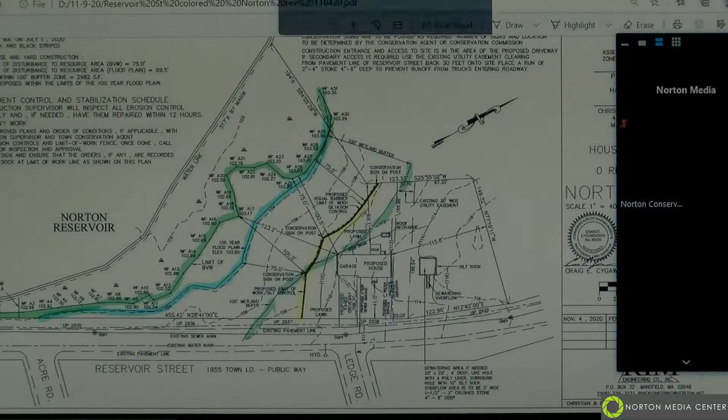Do we have a representative of the applicant? Yes, good evening, Commission. It's Cameron Larson with Environmental Consulting and Restoration. Also with me tonight is Craig Cyganowski with RIM Engineering. I'll open up the presentation, give you an overview of the project, and if you have any questions pertaining to design or engineering, Craig will be available to answer those also.

So can you see the map on the screen yet? I can see it, yes. Okay, just in terms of orientation, because this says 0, the address is 0 Reservoir Street, yet it seems to be within the Grove, is that correct? Or maybe tell me where it is. Yeah, well, it is 0 - they haven't issued it a house number yet. It's across from, near Ledge Road and Acre Road.

The home abutting to the north, I think, is 166 Reservoir Street, if that gives you any reference. So they will issue a different house number then? Yes, correct. Okay.

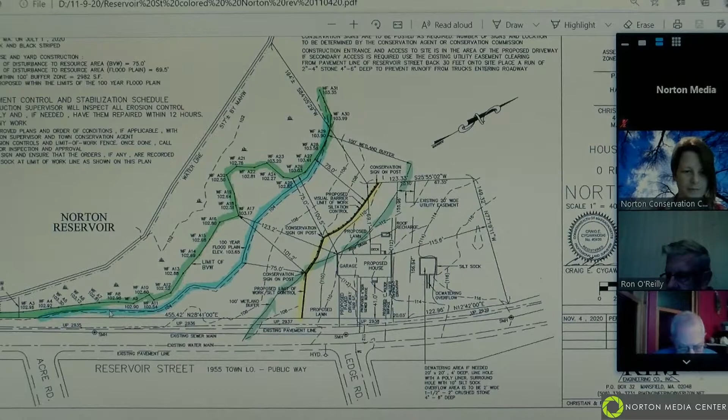All right, any other questions from either commission members or members of the public on this? One more question, sorry. Was there something about dumping leaves, the abutters dumping leaves next to the property? Yes, Jennifer did note that there were some existing leaf debris and lawn debris that most likely has been dumped from abutters or people within the area.

We didn't address it in the application. We're happy to take a look and remove as much as we can. We don't want to be getting into disturbing any of that inner buffer, but if we can easily enough remove it by hand, we can certainly do that.

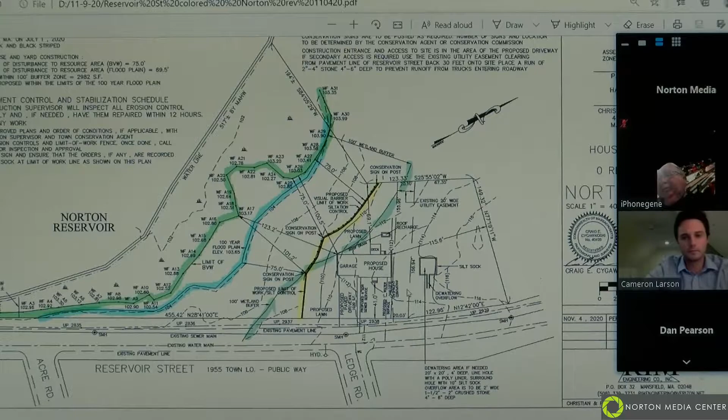Okay, thank you. Wasn't the trash and the stuff that was dumped on the other side of the proposed house in the easement, correct? I don't think it was in the wetland buffer. They actually had both. Oh, both? Okay, never mind.

All right, so I think if there are no further questions from anyone, we can consider closing the request for determination of applicability. I'll make a motion to close the public hearing. All right, we have a motion made by Ron and seconded by Pearson. All right, so roll call vote.

All those in favor? Ron? Aye. Gene? Aye. Dan Pearson, Aye. Dan Doyle, Aye. And I'll throw in an aye, so the motion carried. I'm also here, by the way.

Please, oh, I just, where are you? Oh, you're on the phone. Well, I'm still logging in apparently according to my computer, so I had to call in. Okay, so Lisa, you heard the proceedings then, and how do you vote? Aye.

Okay, and I assume there are no nays, so we're closed, and we can do a quick vote on assuming the project is carried out according to plan, whether a notice of intent has to be filed or not. We want to offer a motion on that?

So what is the update on this project? And do we have a representative presenting it? I see a Chuck Valentine on the list, but you're muted. And do we have another representative besides, there we go. Good evening. Brian Dunn was supposed to be involved with the meeting this evening, and I haven't had any correspondence with him, so I'm not really sure where he is, to be honest with you. I'm kind of a passive bystander to watch the proceedings.

Okay, so Jennifer, have you gotten any feedback as to where we are with this? I do. We have a revised plan, but it looks like I put the wrong one up.

Nope, that's still the wrong one. Everything that you asked for at the last meeting to be revised on the plan has been done. So you're actually all set to close.

All right, so no additional discussion is really needed. The additional information has been submitted. Correct. All right, so any questions about this?

And actually, can we just for a moment put up that older plan so I can get a visual as to what the project was in detail?

So it was a single family house off of Baker Street, that's off of Freeman. And it's really just this part with the septic system and this grading that's in the buffer zone.

And the no disturbance zone, this notation was corrected. The filter mitt does not extend into the road anymore. Trying to think of what else you asked for, but I did check the plans and they were corrected.

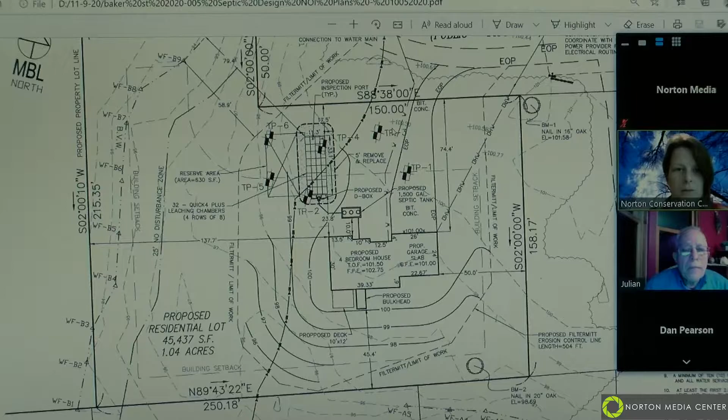All right, so I guess we can consider a motion to close the public hearing for file number 250-1068.

Mr. Chairman, this is Pearson. I'll make a motion to close file 250-1068. All right, motion made by Dan Pearson, seconded by Dan Doyle.

Roll call vote. Ron? Aye. Gene? Aye. Dan Pearson? Aye. Dan Doyle? Aye. And Lisa, you're at the bottom of the screen. Aye. All right, and I'll throw in an aye.

So we can deal with the orders of condition at the end of the meeting? You could, but it's just a boilerplate set of conditions. So nothing unusual other than citing the plan? Correct. Well, do we have a motion?

Did you? Oh, I'm sorry, Jennifer. Did you say anything about the BVW there? Yes, was that changed? There is a finding for it. Yep, okay.

Well, does that mean you want to make— I was going to say, while I'm at it, I'll make a motion to issue the order of conditions for 250-1068. Motion made by Lisa and seconded by?

Second, seconded by, looks like, Ron. I think you got it, right? Yes. All right, so to accept the orders of conditions boilerplate as submitted, file number 250-1068, Ron, how do you vote?

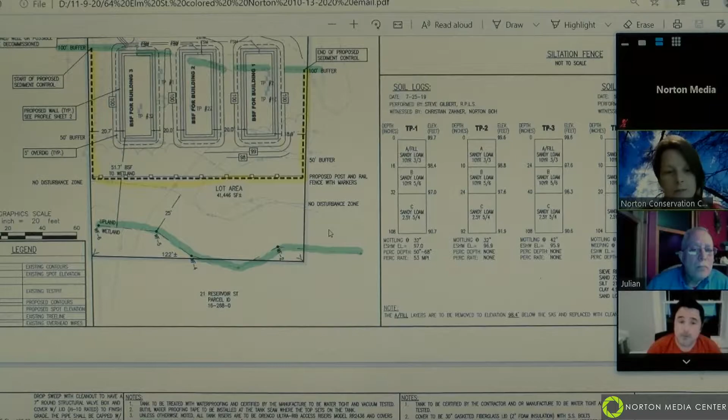So typically, the septic system has to be a minimum of 50 feet from a wetland. So Jamie, maybe you can explain what the difference is and if there's additional protection there, and we can go from there.

Sure. So with this plan we have 3 bottomless sand filters, which include advanced treatment for each bottomless sand filter. The property currently has 3 8-bedroom apartment buildings.

And so what we've done is we've designed an individual septic system for each apartment building. Bottomless sand filters function off of extremely high treatment, which is done through the tanks in the Orenco treatment system.

And then is sent to the bottomless sand filter for treatment and recharge into the ground.

We do have at a minimum 51.7 feet from the edge of the proposed bottomless sand filter to the resource area. So under Title V, we meet that setback.

We've also added in a post and rail fence with markers as asked by the agent and some modifications on some notes and things like that.

Overall, I don't expect any changes from the Board of Health. We've already addressed their peer engineers' comments. We've gotten a letter of support from Orenco, the advanced treatment company.

They've had their engineers go through to check the system, and we've received written approval today, which I can send to Jen. And again, I think this is the best fit for this site.

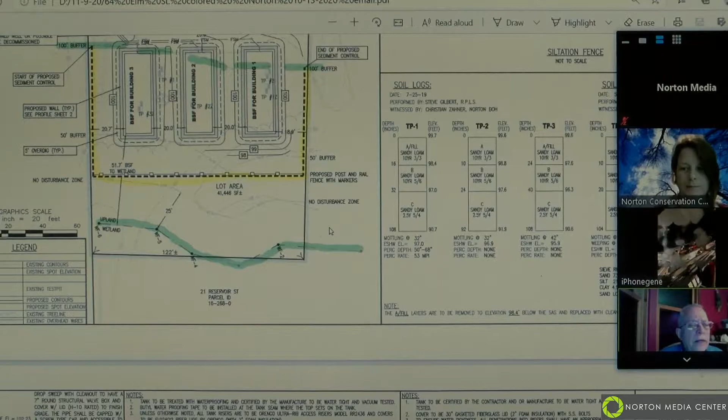Jen, if I get the understanding of your statements, it seems like this is a foregone conclusion that this is going to be acceptable to the Wetland Protection Act, and we potentially can close tonight. The plan as they proposed it and designed it does meet Wetland Protection Act, yes.

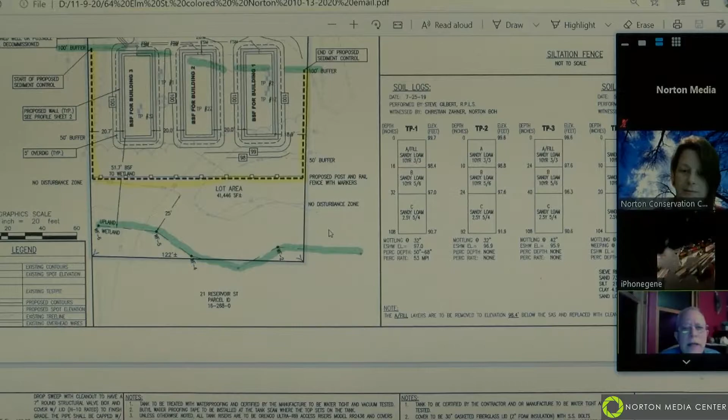And just out of curiosity, exactly where is this site? It says 64 Elm Street, but I'm not familiar with 3 apartment buildings there. Where might that be? Jen, we have a locus map on the top right. This is Elm Street. This is Reservoir, and this is Cross Street. Oh, I think I know where they are, it's right at that curve. Okay, I got it. I just somehow they blend into the background. I didn't realize there were a total of 3 buildings there. It sits back a little bit.

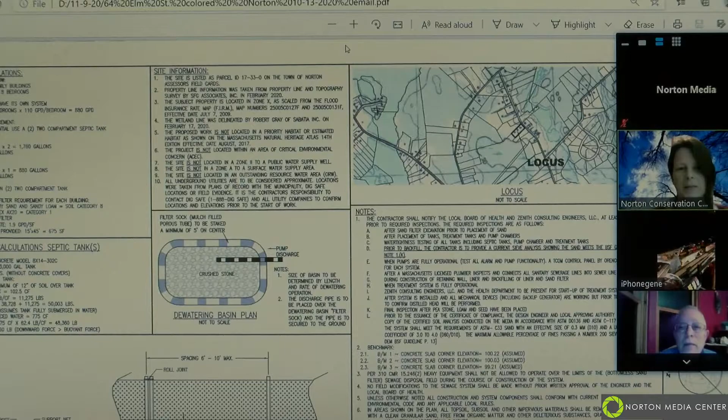All right, Jennifer, one point of clarification I had in your notes and in the order that you wrote up is that you said it's closer than 50 feet, and I think that plan shows it's not. Right, so we just have to change that at some point. Okay, so it's definitely not closer than 50 feet, is that correct? Correct.

51.7, you said, Jamie? From the edge of the bottomless sand filter to the wetland resource, that is correct. But we do have work going within the 50 foot. So there's physical ground disturbance within the 50 feet, but the leaching portion of it is beyond 50 feet. That is correct. Okay, I got it.

So then we can consider, unless there are further comments, a motion to close. I'll make a motion to close notice of intent number 250-101060.

All right, Ron makes a motion, and I just have to say I just got a little message that my internet is unstable, so I might disappear, but I'll log back in. At any rate, the motion is seconded by Lisa. Roll call vote. Ron? Aye. Gene? Aye. Dan Pearson? Aye. Dan Doyle? Aye. And Lisa? Aye. And I'll throw in an aye, so that closes the meeting.

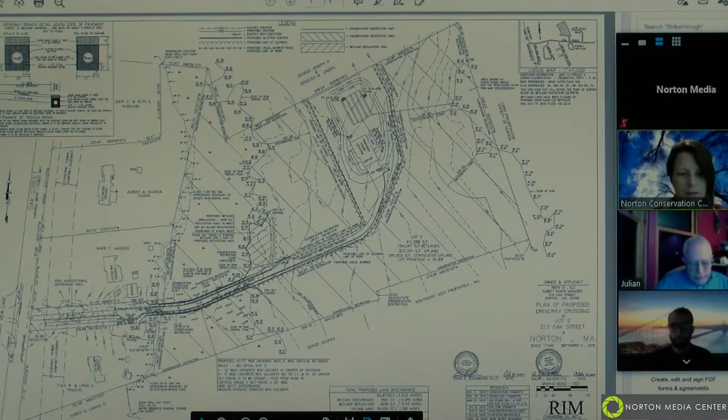Yeah, they're just changing the walls that go through the wetland to a 1-to-1 slope instead of 2-to-1. Because they're putting the block in instead of a slope. And that is the specific amendment change we are being asked to decide upon tonight? Correct. All right.

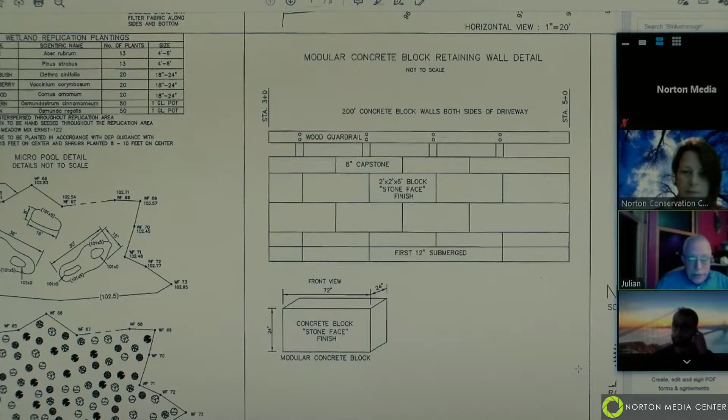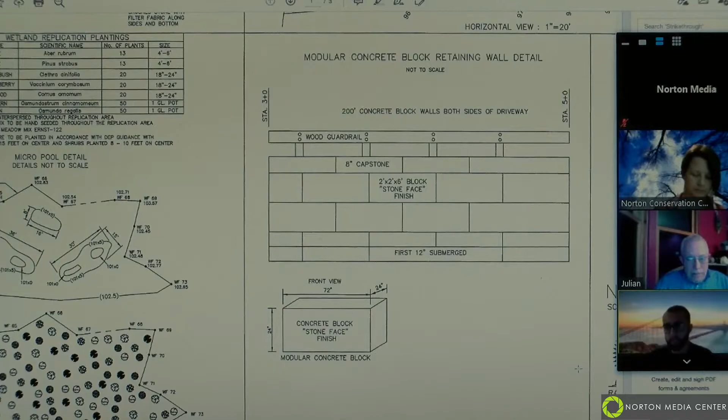The advantage of that is it reduces the amount of wetland incursion. Is that the thought of the applicant? Yes, that's correct. And it's better for runoff and siltation into the wetland as well. Is that the only modification of the original order that is being requested? Yes, that's correct.

I would just throw in, you might want to add a new date for the conservation restriction. So like Tim said, we got the draft on Friday, haven't looked at it yet. So you may want to consider another date in the order for when that will be finished. Okay, what would be a reasonable time frame?

Are you asking that of me? Well, yeah, you're part of it, sure. Sure, so generally these things take a few months. It's no quick work for conservation restriction. But when would you like it by?

Well, your permit right now says you have to have it completed before the building is occupied. Right, and so the draft was supposed to be in before you started construction, and it wasn't. So I just want to make sure you have another milestone you're going toward, so you reach it before you get to the end of the project, and you want to have the building occupied, and the restriction isn't finished. Sure, I understand, and we'll be cognizant of that deadline, anticipating approaching that date.

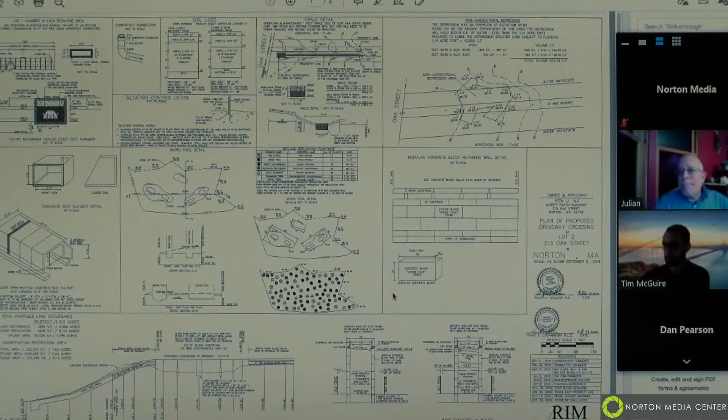Hi, Thomas Braconi here. Sorry, hi, can you hear me? Yeah, yeah, okay. Yeah, they're not going to be occupying the house until sometime in June. Okay, well, would it be reasonable to revisit the progress on the conservation restriction around March 1st? I thought that was very fair listening in. I think that's excellent.

So we're going to have that day be June 1st? Occupancy and move-in will probably be in June, thereabouts. So March would be excellent.

Thank you. All right, so if those are the only two items with regard to the amended order, I think we can consider a vote, unless there's further discussion. If there's no further discussion, somebody can offer a motion to accept the two items as amendments.

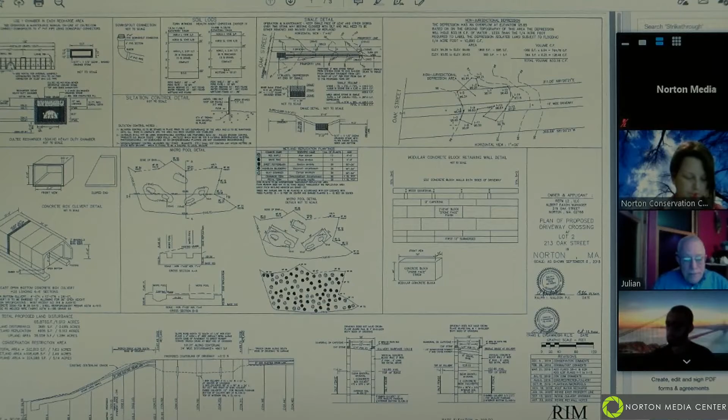I'll make a motion to issue an amendment to order of conditions number 250-1032. Second. Motion made by Lisa and seconded by Dan Pearson. Roll call vote, those in favor: Ron, aye. Gene, aye. Dan Doyle, aye. Dan Pearson, aye. Lisa, aye. And I'll throw in an aye as well.

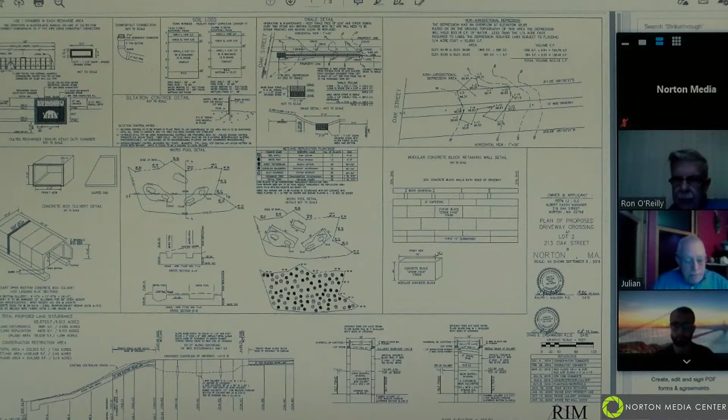Okay, just so everybody's clear, the draft amended order isn't drafted yet, but it will be for the next meeting, and that's when you can sign it. But it's okay that you voted first. It's a discrete item having to do with the approval of the replication area as constructed now, the revision of the 1-to-1 block wall, and the new date on the conservation restriction.

All right, with that completed, we can move on to item E. Thank you very much. You're very welcome.

For notice of intent file number 250-1059, AR Building Company concerning 195 Mansfield Avenue, has been continued for 4 prior meetings. It has to do with a proposed project to install stormwater management associated with the construction of a 40B apartment building within 100 feet of bordering vegetated wetlands. They requested a continuance to the next meeting.

Mr. Chairman, I will make a motion to continue file 250-1059 to the next conservation meeting. Second. Okay, I'll just define the next meeting as... the 23rd. Okay.